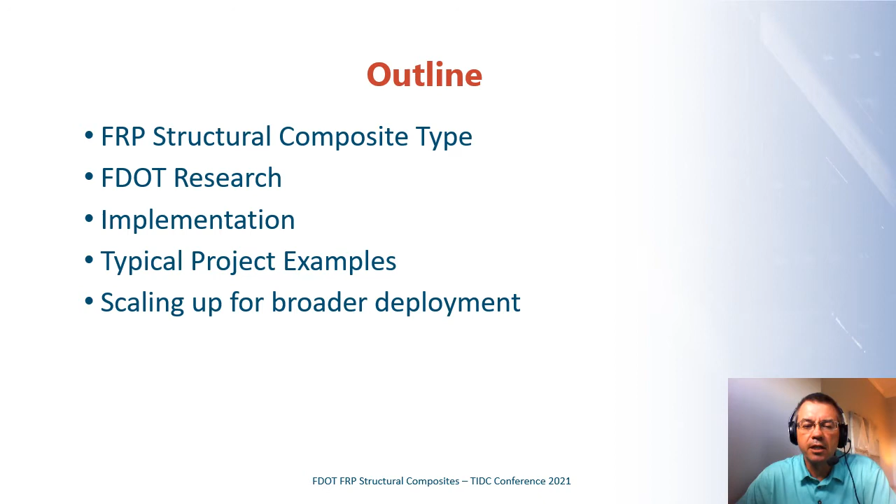The primary motivation for Florida to consider FRP structural composites is related to corrosion and durability. Florida being a coastal state, similar to Maine, we have a large coastline, heavily developed, and a lot of infrastructure close to that coastline. So we're looking at saltwater applications, either within or above, or very close in proximity, and so that's a primary motivation.

There are some potential benefits to composites in their lightweight and unique formability, and so hopefully we'll be able to take advantage of some of those in the future, but the motivation for now is primarily durability of our foundations.

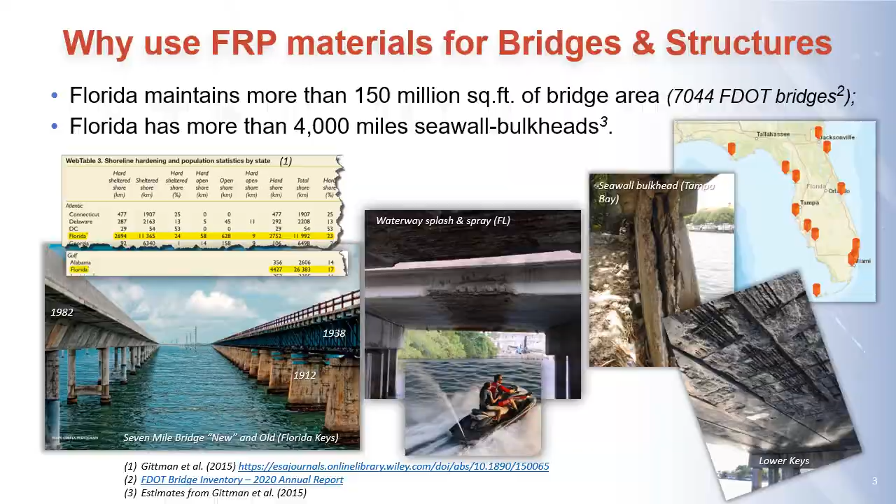Looking at different types of structural composites that we've used to date, for pre-stressing, it's limited to carbon pre-stressing cable for internal reinforcement. We have not done any demonstration on cable stays like you have up there in Maine. We have looked at some in collaboration with university alternate pre-stressing materials way back in the past with Aramid, but more recently with the lower strength GFRP and BFRP materials. So there's some potential there in the future.

For non-prestressed applications, the major use currently is with internal reinforcing bar, reinforced concrete, and primarily with glass GFRP rebar, since that has been standardized under ASTM D7957. We've also done some research durability and strength-wise with basalt FRP rebar, and we're confident we can implement that at a similar level as the GFRP, so we have developed specifications for that.

Carbon bar, due to the cost and the higher mechanical properties, has primarily been limited to near-surface mount applications for rehabilitation.

Then looking at FRP structural members and systems, fender systems is probably the main use for FRP composites for Florida at the moment. Those are both thermoplastic and thermoset type structures, relatively sacrificial, so not quite the same level of risk as a full-size bridge. I recognize that, but far superior to timber systems that we have traditionally used.

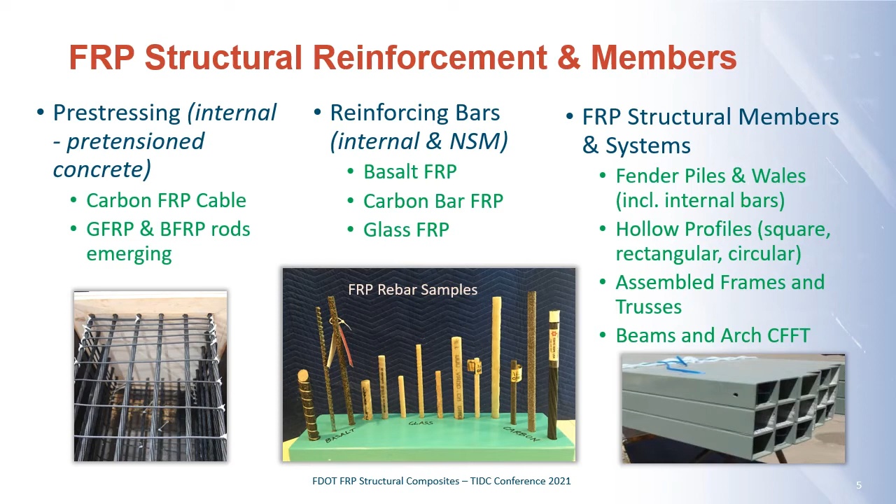Can't talk about FRP structural reinforcement without strengthening and repair, since that is our primary application for rehabilitation, especially when we have oversize truck impacts and significant damage to our pre-stressed girders, or significant corrosion for our low-level overwater structures.

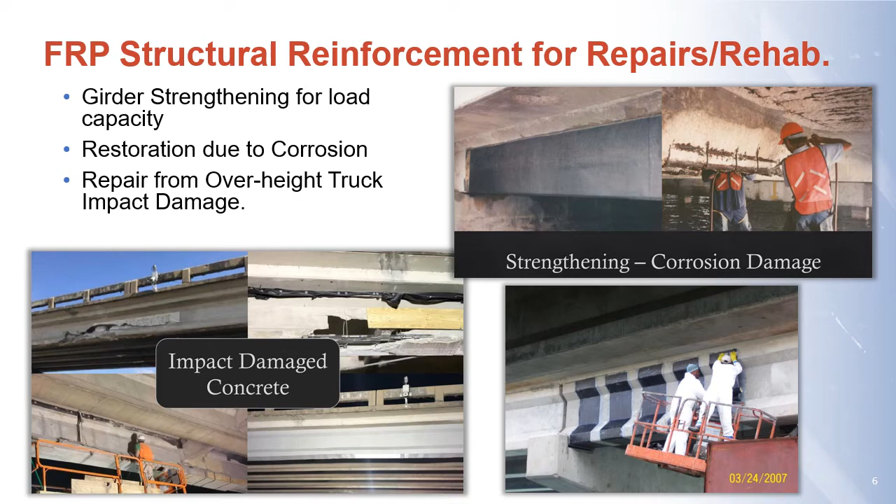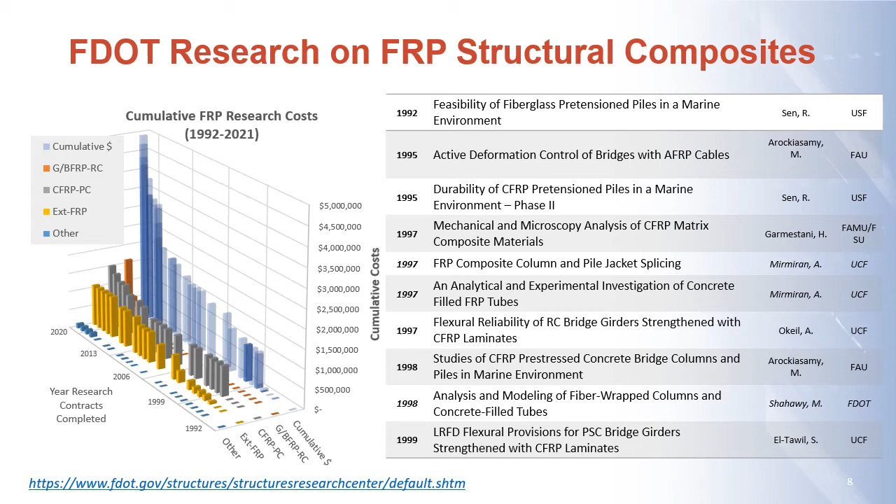Looking at some of the research, just touching on the scope that we've addressed in the past and currently looking at, we started out looking at marine pile systems, obviously, and we ended up there about 20 years later with a completed system.

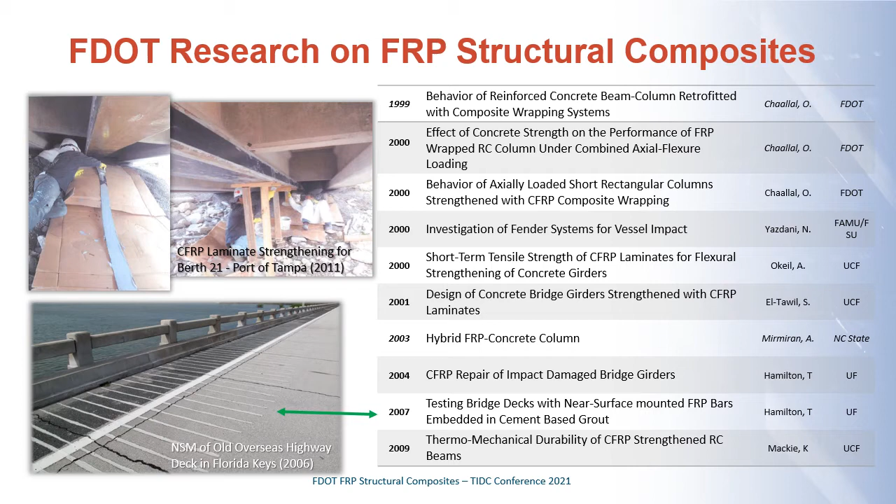We've also looked at several composite rehabilitation systems in the 1990s, and then more recently we looked at the durability of some of those old rehabilitation systems, repair systems, with relatively good success. So that gives us more confidence moving forward to continue using those systems, perhaps for even a longer service life.

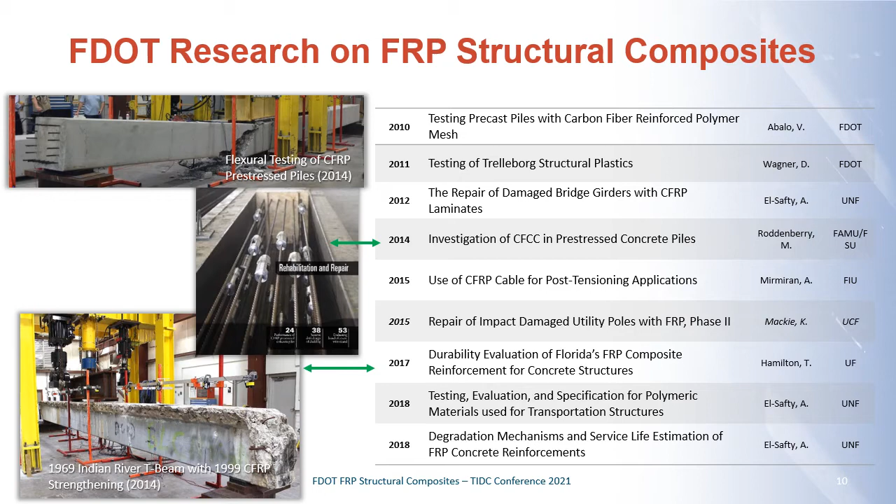And then we've also been looking at novel applications of FRP reinforcement for, let's say, extending the usefulness of our current pre-stress piling with GFRP spirals instead of what we currently specify, which is carbon spirals, due to the high stiffness. Whether that actually becomes feasible, we'll find out in the next year or so.

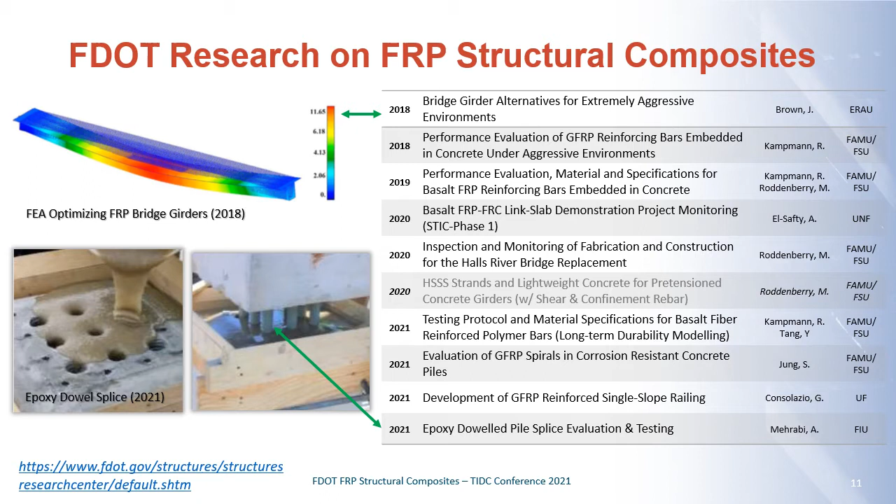And then we've also developed some protocols for testing of GFRP reinforced railing with a pendulum system down in Florida, and then an epoxy dowel GFRP splice for our pre-stress piling when you have need to splice those concrete piles in construction. So those are just highlights of some of the more recent projects. You can see a full list of those at the website on the previous slide.

So just reiterating the process that we've gone through over the years, primarily focused on rehabilitation and strengthening and repair, then the fender systems, and then internal reinforcement with some novel rebar, basalt rebar, which was a relatively new fiber to the West in the last 2 decades.

So in 2014, a demonstration of 2 sections of retaining wall were built down in the Port of Miami, and those are still functioning well. Not far away, the University of Miami did some novel pre-stressed double T pedestrian bridges with a number of different FRP type reinforcing systems, basalt and glass, for the substructure support.

The largest project with the most extensive use of different kinds of structural composites was the Halls River Bridge, built primarily between 2017 and 2019. That one featured the hybrid composite beam, which I believe had some work done at the University of Maine, then pre-stressing strands in the piles, bridge bearing piles, and the concrete sheet piles for the bulkhead retaining walls, and reinforcing bars in the caps for the pile bents and the decks and traffic railings.

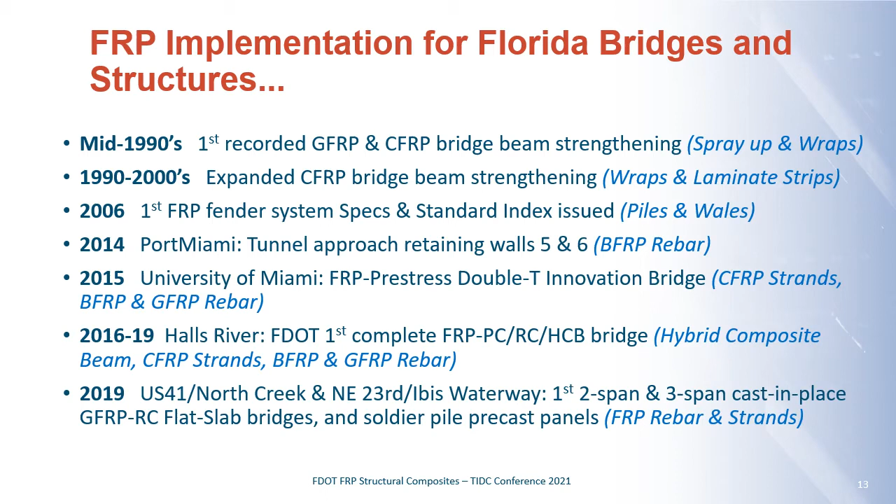As I mentioned earlier, durability is the primary reason for considering FRP composites. There may be some structural advantages due to the lightweight. There might also be some advantages in coupling FRP with other technologies, such as lightweight or ultra high performance concrete, and that high strength stainless steel pre-stressing strand is really a competitive system that we're currently allowing to compete against the carbon fiber cable for pre-stressed piles, and shall be implementing for pre-stressed beams as well.

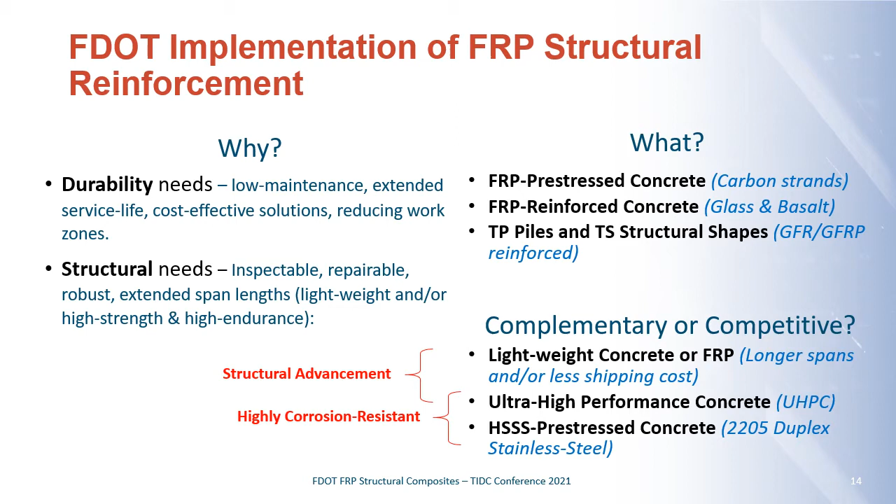To provide this information to our design community, we've developed these web pages for jumping off points where you can find a lot of information related to both design, construction, material acceptance, and example project applications.

We don't only have FRP materials there, as you can see in the two red boxes. There's some similar competing corrosion resistant materials related to ultra high performance concrete, and we'll be launching one for stainless steel in the near future as well.

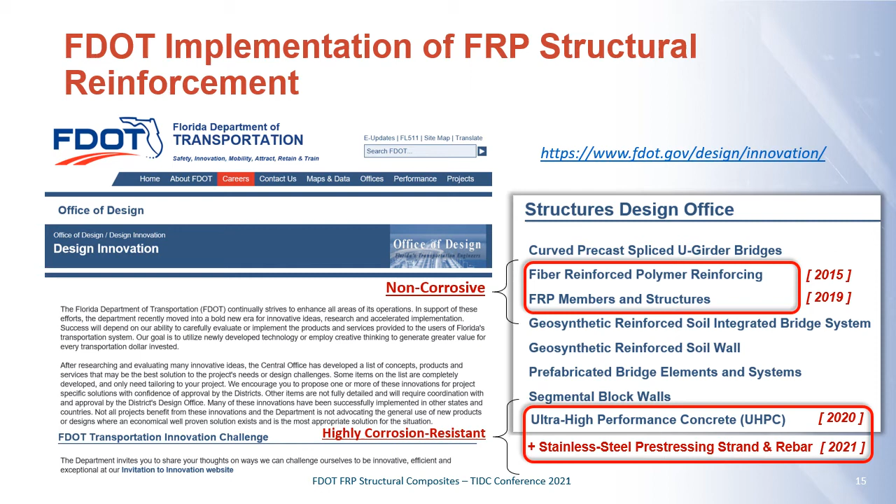Drilling down into a couple of those web pages, we have one on FRP reinforcing, including strand, and then another on FRP members and structures. That one is a little newer and is still being developed, so we have some expectations in the future that we'll have more projects available on that one. But you're welcome to go out to our website and take a look at the content on there.

It provides links to our structures manual. Volume 4 is our primary source for design, and then our construction specifications have various sections that relate to FRP that have been developed. And on the manufacturer's side, we don't do an approved products list for FRP.

We have approved manufacturers or production facilities, and there's a fairly robust system set up in the state by the State Materials Office in their materials manual, and then you're able to access the currently approved producers on this system called MAC. On the next slide, we'll show you some of the producers that are currently available.

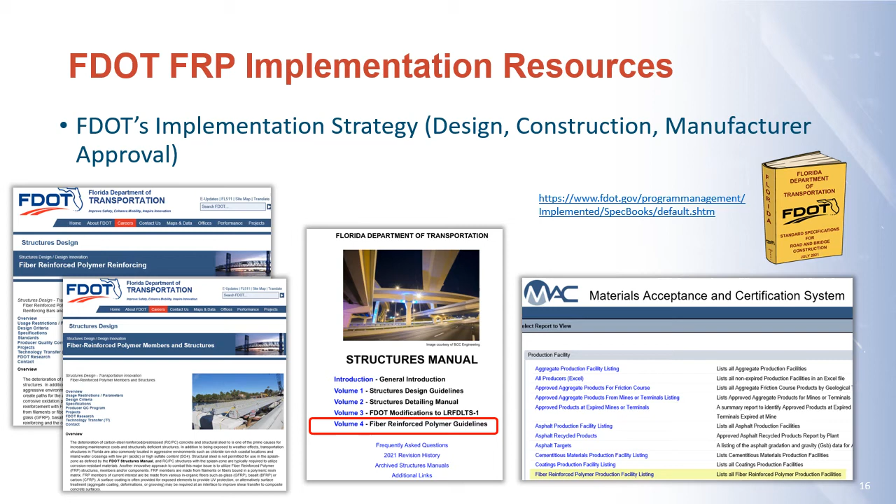We have about 8 related to FRP rebar and strand, and then a few related to structural members, primarily fender systems, but also sheet piles and pultruded shapes.

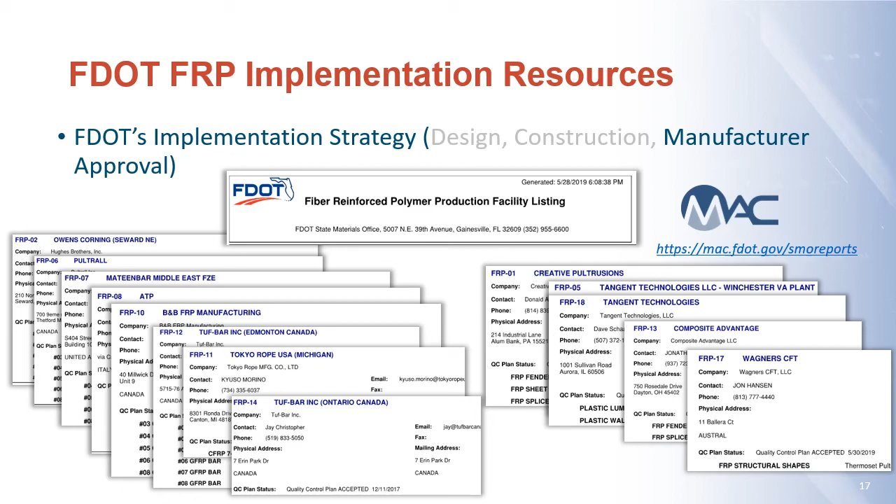Looking at some example projects, we have a number of different projects primarily related to reinforced and pre-stressed concrete, soldier piles with precast panel systems. We did some secant piles, which are essentially auger cast overlapping piles for a coastal seawall, and then our first pre-stressed CFRP bridge slab system as a replacement down in the Keys. We did a number of pre-stressed concrete sheet piles, starting out with Halls River Bridge, which also utilized the hybrid composite beams as a superstructure system, and then just our go-to polymeric fender systems for our navigational waterway channels.

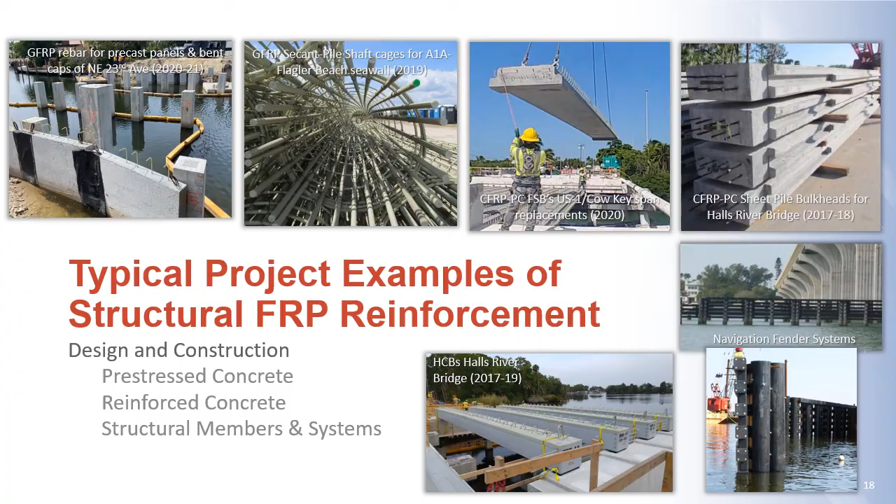On those web pages, there is a projects tab which has fast fact sheets for a number of example projects, just 2-page sheets that give the highlights of each project. So I encourage you to go and look at those for more details.

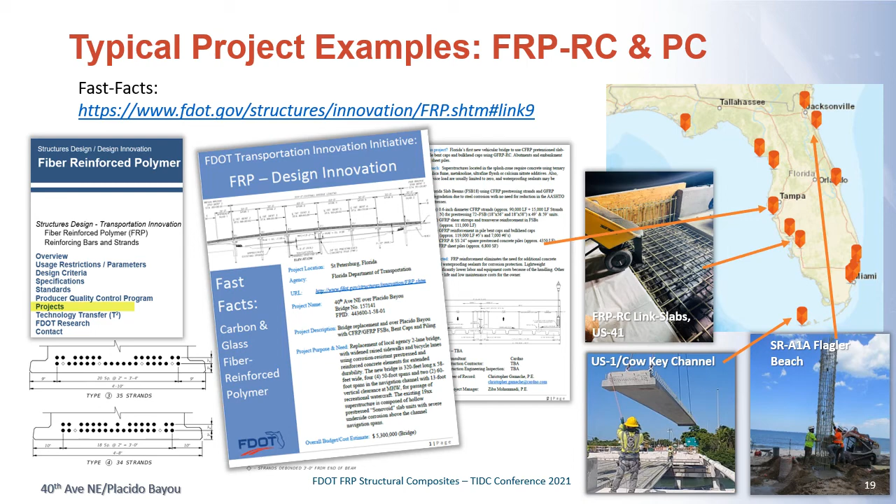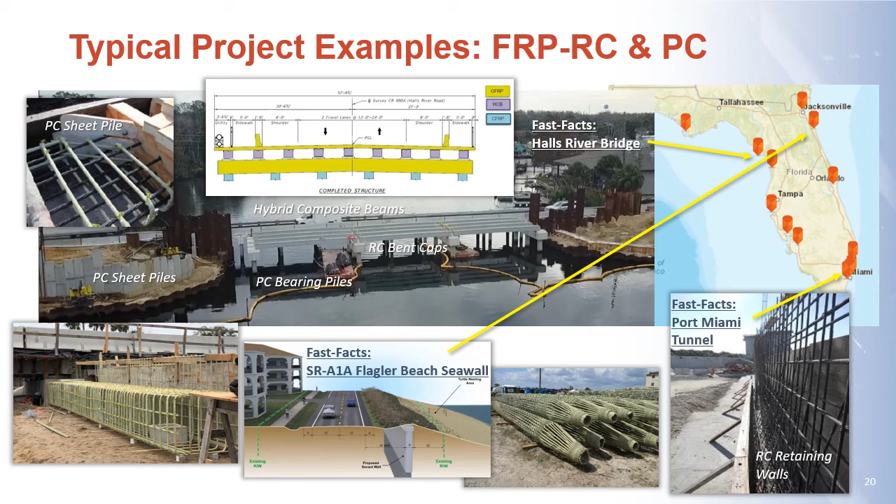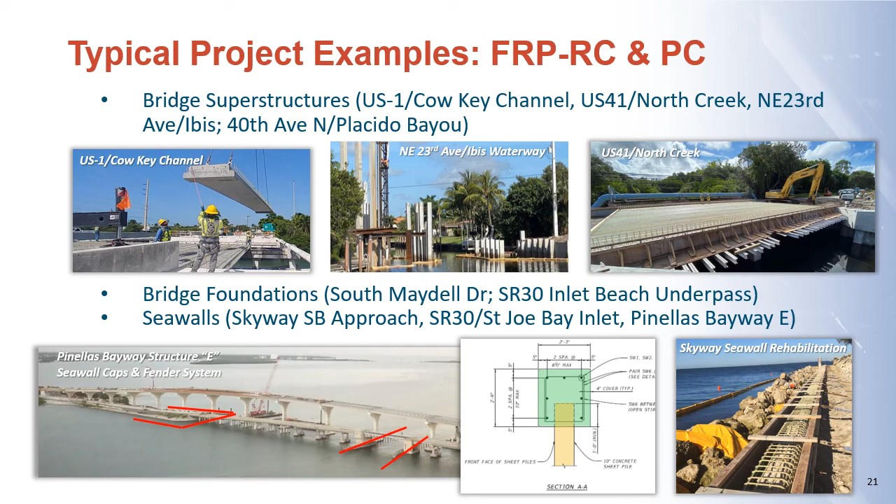We have various examples on the page here related to Halls River Bridge, and then the Flagler Beach Seawall project, Port of Miami Tunnel. Several projects just recently completed for cast in place GFRP slab bridges, and always doing more seawalls and fender systems.

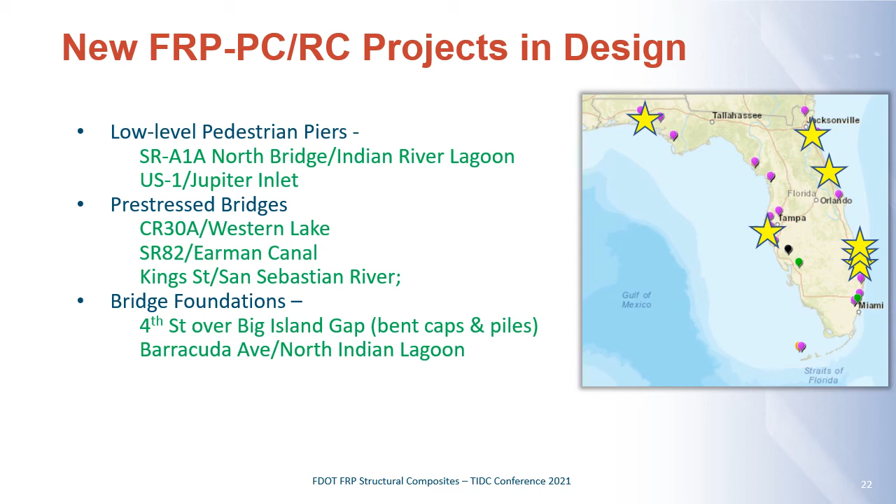A number of projects in final design or letting and to be constructed in the next few years, so keep an eye out for those.

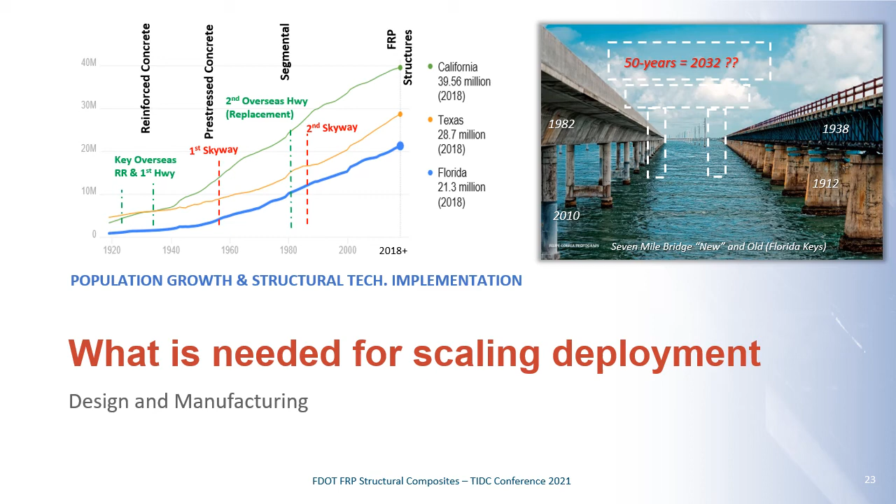Looking at what we really need for scaling deployment for broader application. Florida being a growth state, we want to keep our existing system in a good state of repair, so as it expands, we don't have escalating maintenance costs. So just some thoughts on implementation.

We really need a way for cost justification, because a lot of these systems are more expensive up front. May not always be the case, but we need a competitive bidding system to evaluate, for the contractor, one structural system against perhaps a more conventional system, and how you weight those is something that would need to be identified if first cost is not your primary selection.

And then standardization of specifications and standard drawings is always helpful to point everybody in the same direction. Potentially harmonization of design codes, at least within the US and maybe North America and eventually beyond. And then devil's always in the details, so improvement of design detailing for our designers and getting that information shared.

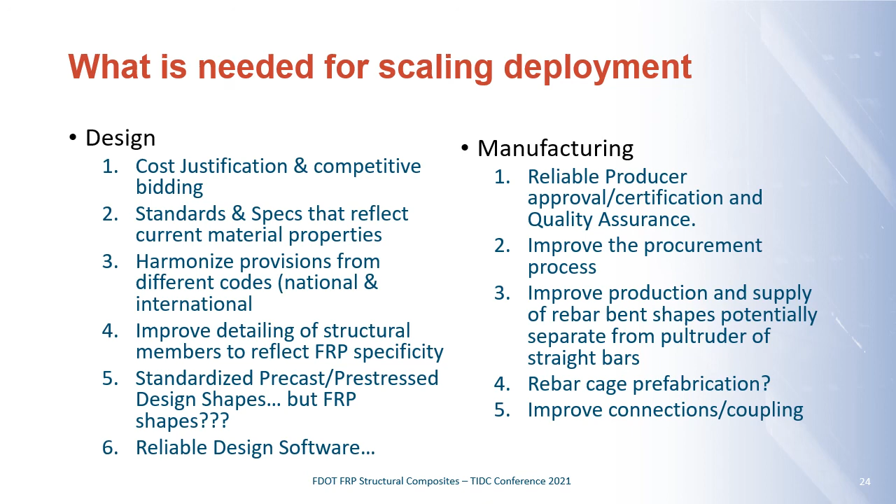So there's a number of things. Software is also very useful and builds a lot of confidence with engineering designers. On the manufacturing side, I won't go into detail on those, but those are some things that can be explored as well. And so that's all I really have time for.